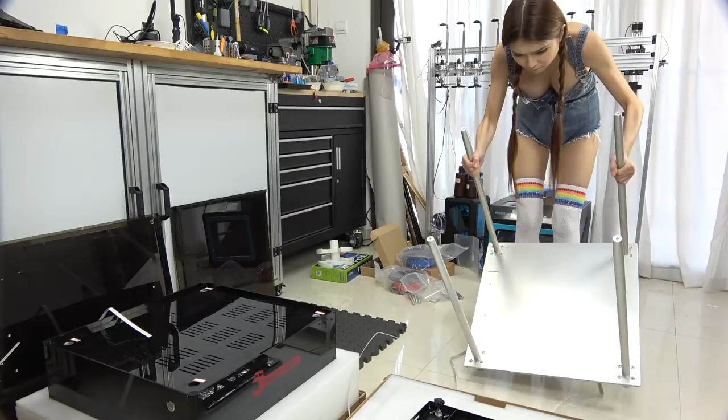There's no way I can put that on this, so I'm going to get my elves to help me. Well, I have to keep going and see what I have to do next. Next, there is still something in the box.

Next step, I am going to put the Z-axis in. Here there is this part. There is a groove here. Is it called groove? In Chinese, we call it 沟槽. I'll show you later. Or maybe you can see it from here. So let me get my screws first.

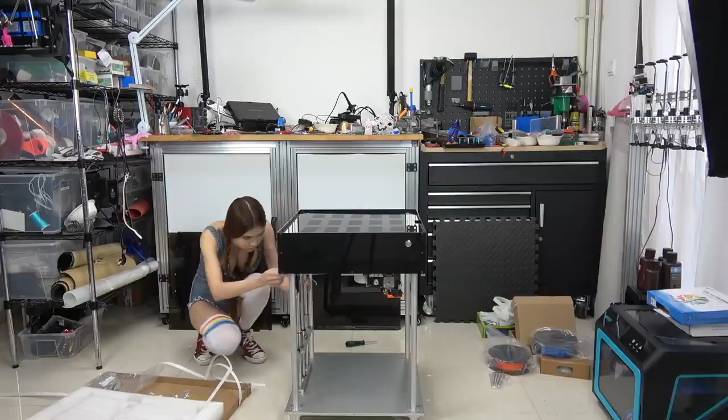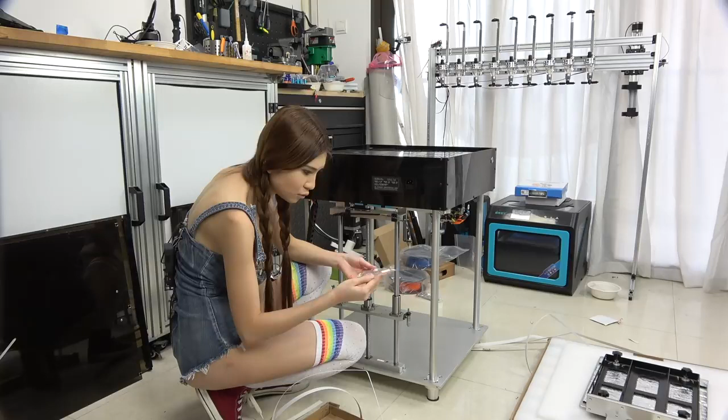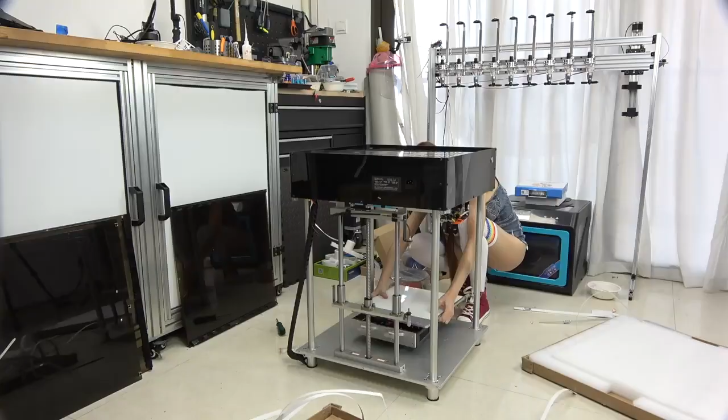I like this. The motor is probably on this side, because the screw goes in there. I see. So the longer screw goes at the bottom, and the shorter screw goes on the top because there are labels on the back. I have to call on my elves. Be right back.

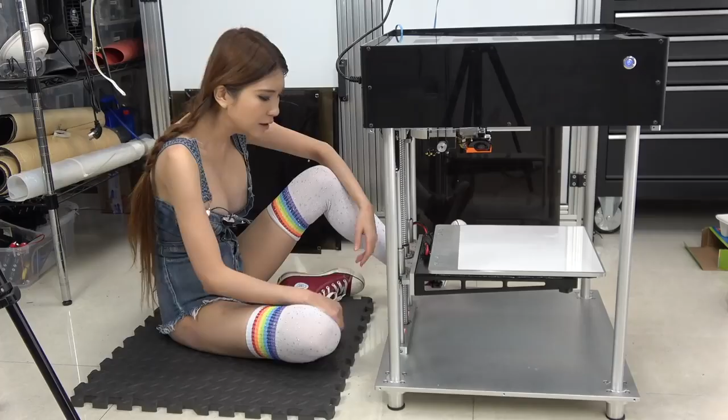So the printer is a sample. It is heavy and it's rigid because they're using the 10mm thick machined aluminum plate. And on this end, there is a micrometer for adjusting Z-axis, and on the other end is the induction sensor. Now let's look at the top.

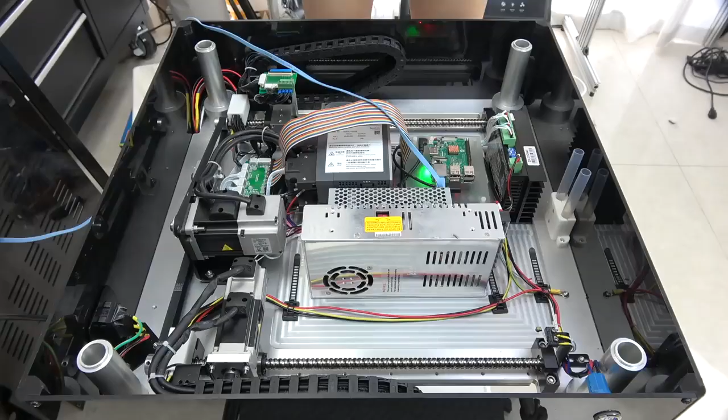There is a Raspberry Pi here. It is running OctoPrint. My friend Gina Häußge, she's the developer of OctoPrint. I will let her tell you all about it.

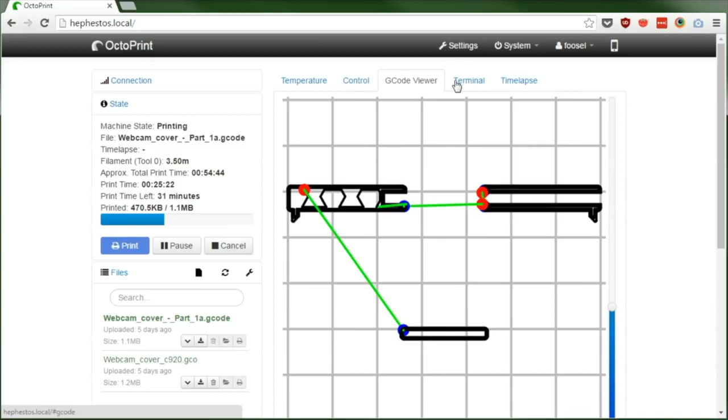Hi, I'm Gina Häußge, also known as Foosel, and I'm the creator and main developer of OctoPrint. OctoPrint is a web interface for 3D printers that allows you to control and monitor all aspects of your printer and the ongoing print jobs right from within any browser on your network. You can also create time-lapse recordings of your prints, and on top of that, there's also a fancy plugin system included that allows extending the core functionality in various cool directions.

OctoPrint runs basically everywhere, be it a cheap computer, like a Raspberry Pi, or that laptop you still got lying around. And it is free and open source software.

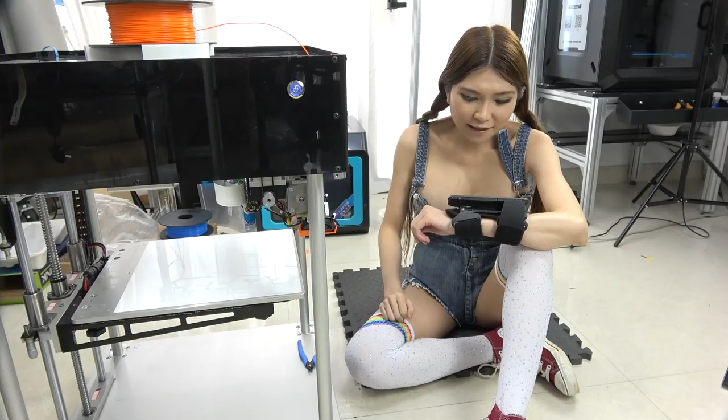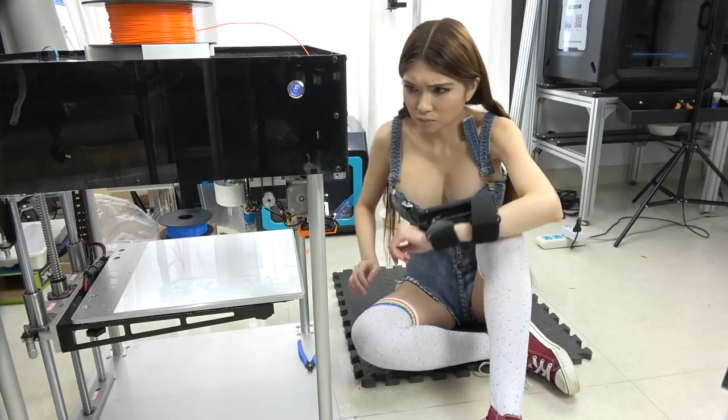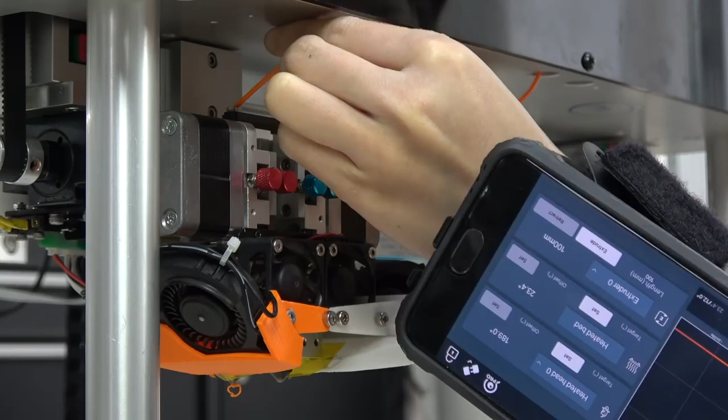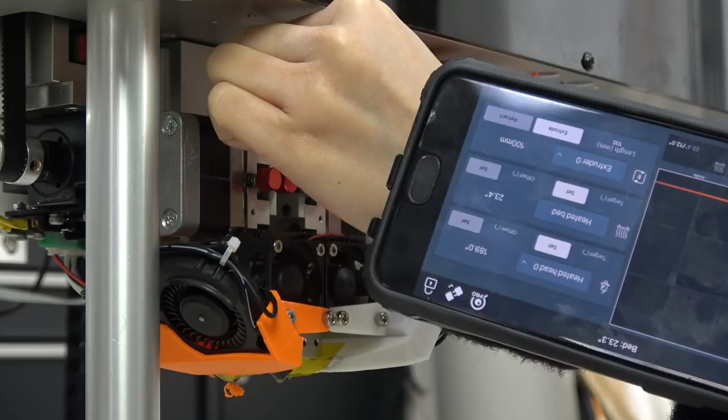Okay, I think this is level. Now I will load the filament. Now I'm going to set the temperature to 190. I think that's it. Let's feed in some filament. Okay, now it is coming out.

Now I'm going to download her MakerCoin. This is the MakerCoin she used to test her printer. Now we're in Simplify3D. I'm just going to drop that. It just dropped right in the middle of the build plate. Lydia's version is printed at 200%, so I'm going to change it all to 200%, and it automatically scales that.

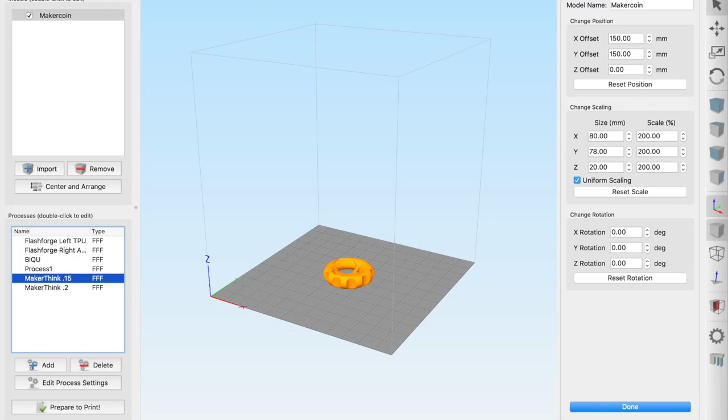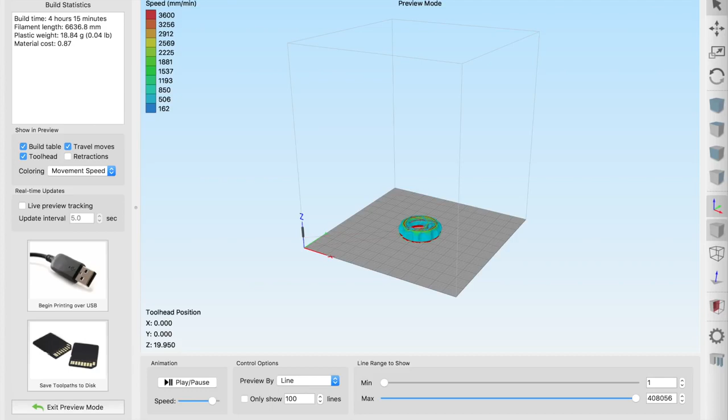I think this one needs support, so I'm going to check generate support material, and this profile is just from the MakerThink people. So as is, I'm just gonna use that, and it looks good. So the build time is 4 hours 15 minutes. I'm going to save the toolpaths because later I have to upload it to OctoPrint.

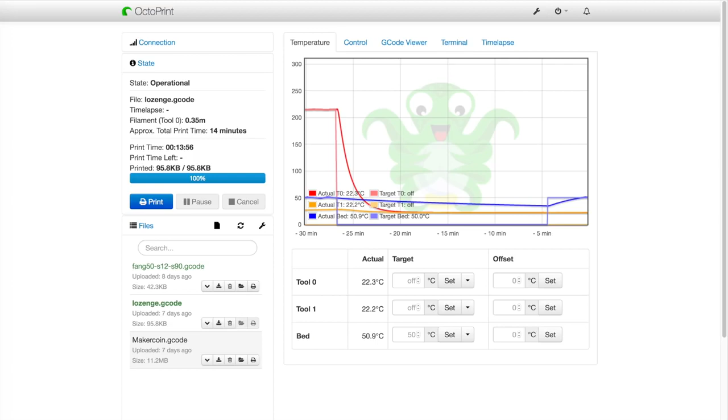Okay, I'm just gonna drag that G-code right onto the OctoPrint window. And there it is, Makercoin.gcode. And everything seems right. It has a big heavy bed, so I'm just gonna heat it up a little bit first. I think that's a good idea. Okay, everything seems ready to go. Let's print it.

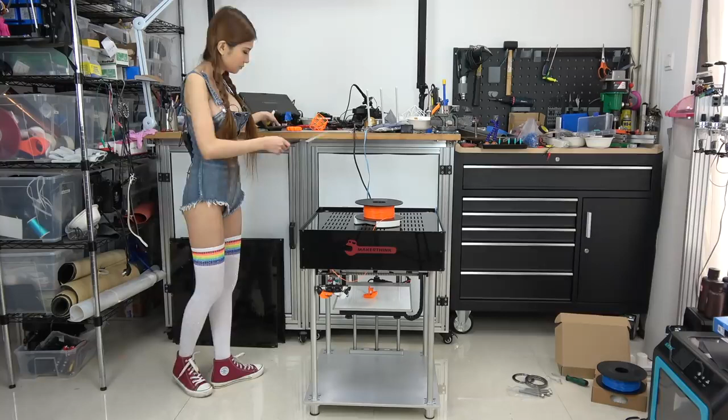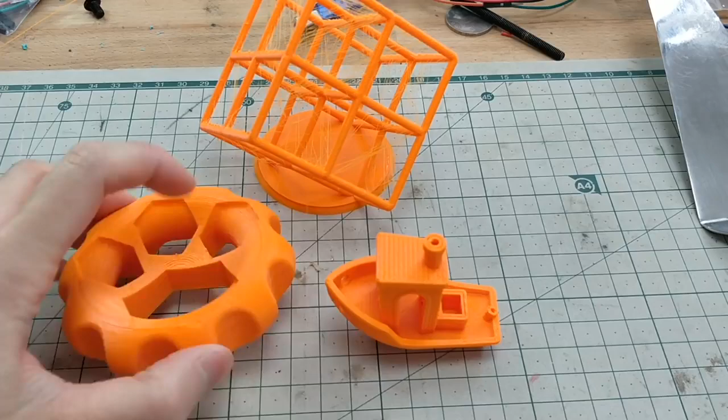Looks good. All these objects are printed at 0.15. It looks clean, and take a look at the Benchy boat. The layer lines are fine, but I guess I could dial it in a bit because I'm using Simplify3D. But the MakersMuse torture cube is a little bit stringy and there are some small blobs on the side. But for the first print, I think it is more than acceptable.

So what's the verdict? There is no verdict. This is just a pre-production 3D printer. The MakerThink company sent it to me so that you guys can see what improvements they can make and change. We've been going through some discussions of what they can do to improve it. But as you know, I'm not super technical. They sent it to me so that you guys can see how it works and maybe give them some feedback. They respect feedback from the community; unlike some of the Chinese companies that are not so responsive, this one is open to any suggestions.